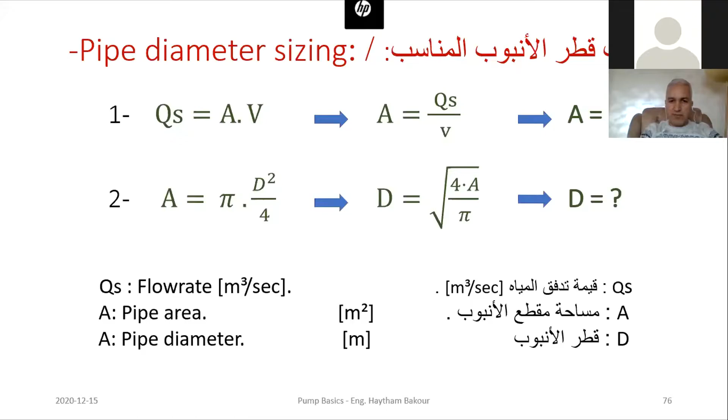To calculate the total dynamic head, H total equals H static, the static head, plus HF, which is the head losses in the pipe, plus HM, the minor head losses. Those minor losses happen within the accessories of the network, such as valves, U-turns, and any other accessory for the network. We reflect those as HM. We're going to talk about those in detail to reach the total dynamic head.

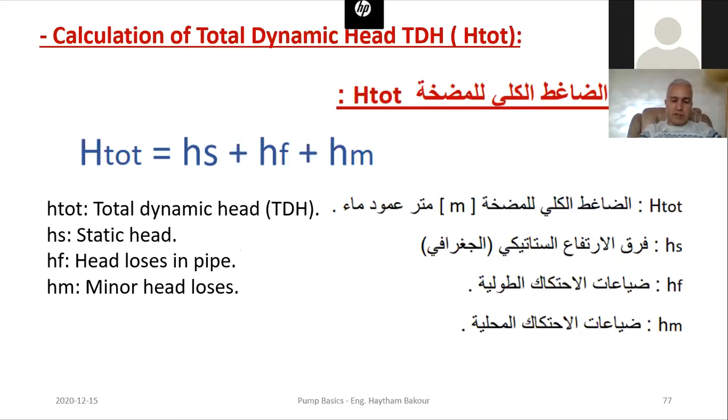We need to unify the units we are calculating with. We are going to talk about each one in detail, and we are going to see how we use them within the Excel sheet.

As a start, let's talk about the total static head. For the tank, we are pumping the water from and to, reaching the upper tank, so there is a total static head here, the elevation difference between the two tanks, the water surface difference between them. When the first tank is higher than the pump, we need to subtract those values from each other. When we have the tank lower than the pump, we need to sum the two values, between the first tank and the center of our pump, and the other tank and the center of the pump, so we can get this total static head as shown in the chart here.

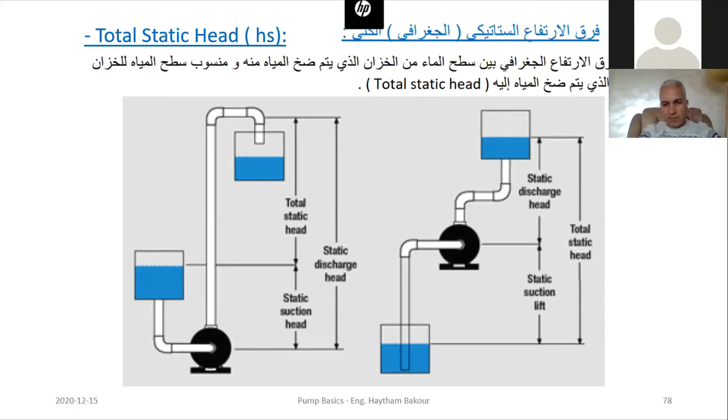So that is the total static head. You can notice that we are using many different terminologies, but this is based on many international references and even international companies. We are trying to combine lots of techniques and terminologies to make your life easier.

We are going to provide you with a program, like an automatic equation, that can give you the results easily. So L is the length of pipe multiplied by QS, which is the water flow rate, divided by the Hazen-Williams roughness constant multiplied by D, which is the inside pipe diameter.

So we have already explained those codes, but using which units. It is in meters of water. We are going to explain in detail from where we are getting those values and what are the variables, and we are going to provide you with the automatic equation to calculate those easily.

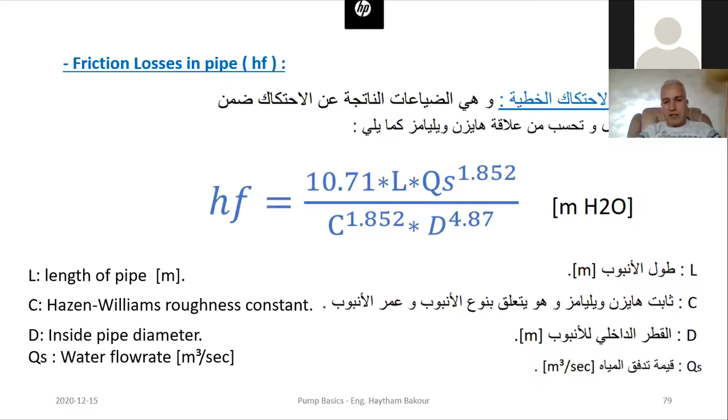Through this table, we can have the Hazen-Williams constant value. It is provided by the manufacturing company, or we have it based on the material. For plastic, it's 130 to 150. Polyethylene, PE, PEH, it is 140. For steel, new unlined, it's 140, 150. The older the pipe, the lower the value. So we are changing the value based on the age of the pipe, and it is between 130 and 150.

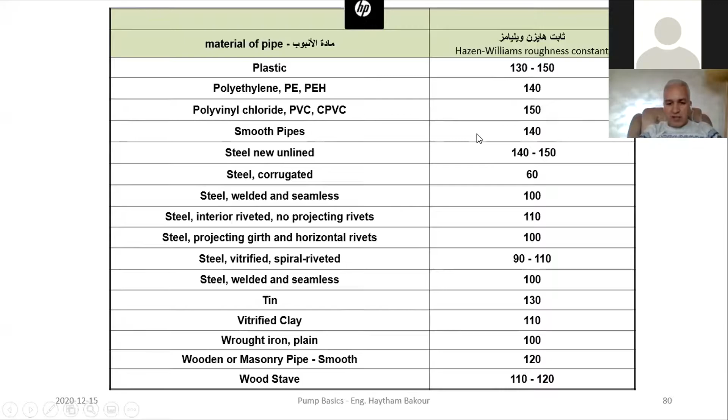And those are the losses from inside the pipe, while the other loss is the minor losses in the accessories, and those are within the accessories in the network, like valves and others. So those minor losses, Hm equals K, which is a constant, a friction losses constant provided by the manufacturing company, multiplied by V squared, which is the speed, divided by 2 multiplied by gravity. The result, Hm, would be in meters of water. It should be provided by the manufacturing company.

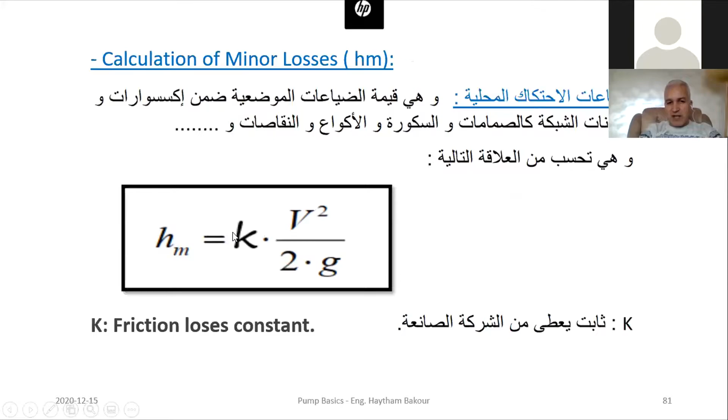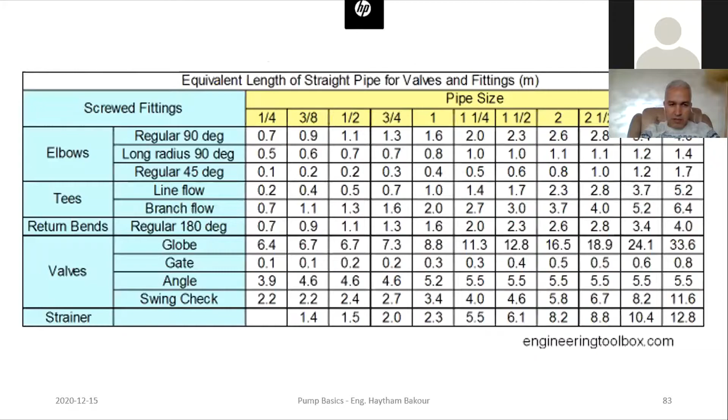We are going to talk about the software calculating those automatically, and we are going to talk about them step by step. This is providing the water flow rate inside the pipe, and the actual pipe diameter, everything. We are going to talk about it in detail when we are talking about the Excel software.

Yes, item, just one question.

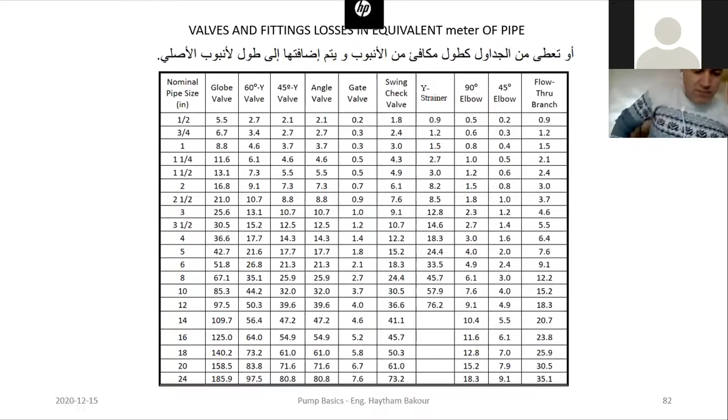No, we are not taking the speed of the water in this table. Never. I'm going to explain that later on, give me a minute. When we are taking into consideration the losses equivalent here, we are not considering the speed. We are going to consider the speed in a different table. This is about the accessory, what is the type, what is the diameter, and what are the losses. It is not about the speed now. Is it clear?

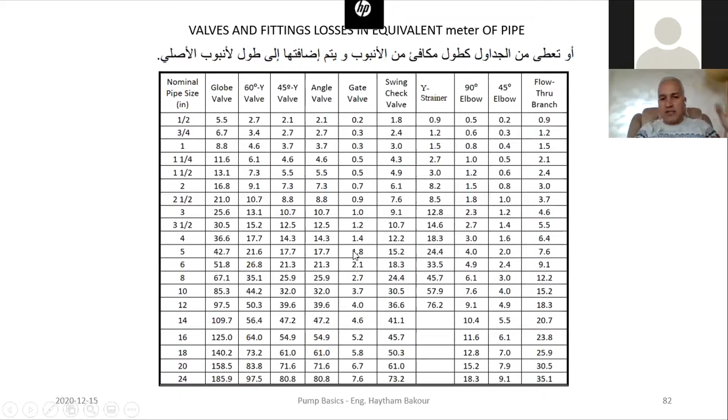Now we are going to explain the Excel tool, which shows in detail how we are calculating these values. Its role is to help the designer. We need to know the theoretical part, but this software makes our lives easier. We can change any parameter and it provides us with the end result.

If we have a flow rate, we put here the water flow rate. If you have 60 cubic meters per hour, and then the water velocity is 1 meter per second, it should be as close to 1 as possible. We put it in the orange cells, which is manual input, while the others are calculated automatically.

So based on the velocity I put, which is 1, I can find the pipe diameter is 5.7. But 5.7 doesn't exist as a pipe diameter, so the software rounds it up to a holistic number, which is 6 inches. Based on that, the software provides me with the exact actual water velocity, which is 0.9.

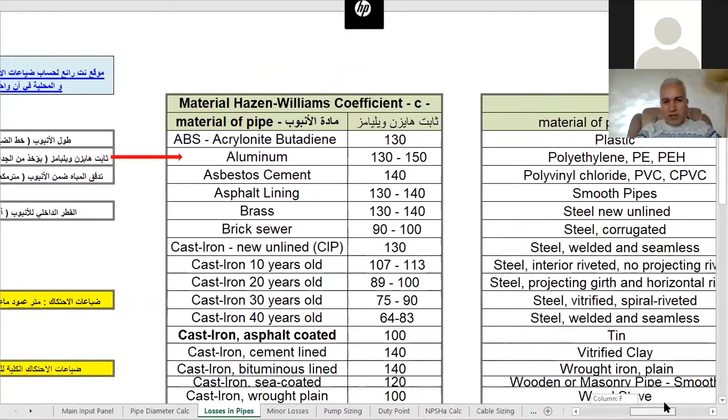So we have the length of pipes as 1,400 meters, and we have 120 as the Hazen-Williams constant, which we extracted from tables based on the type of material of the pipe. If it's iron and 10 years old, it's between 107 and 113. If it's 20 years old, the value is 89 to 100. If it's an iron pipe and 30 years old, the losses would be higher, which is 75 to 90, because it has been eaten from inside and has rust.

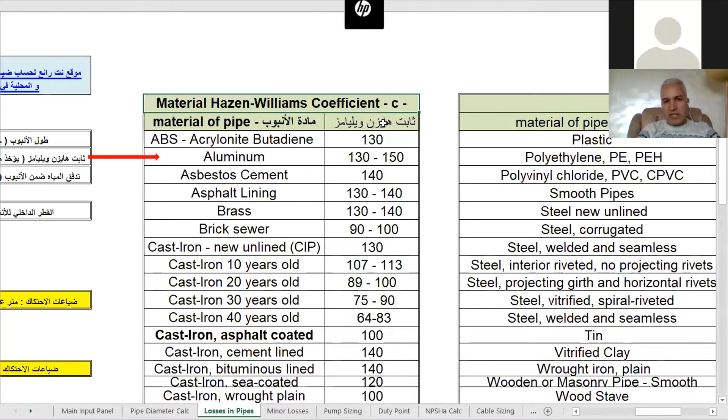So this is the Hazen-Williams constant and how we can find it. We put it here within this cell. So I have the first parameter as the length of the pipe, the second one is the Hazen-Williams constant, then the volume of flow, which has been taken automatically from the first page.

So we enter as input only the orange cells. This one is 5 inches as pipe diameter, which has been taken from this page automatically. So I have the friction head losses for each 100 meters of pipe is 1.8, and for the total head losses, we have 25.27 meters.

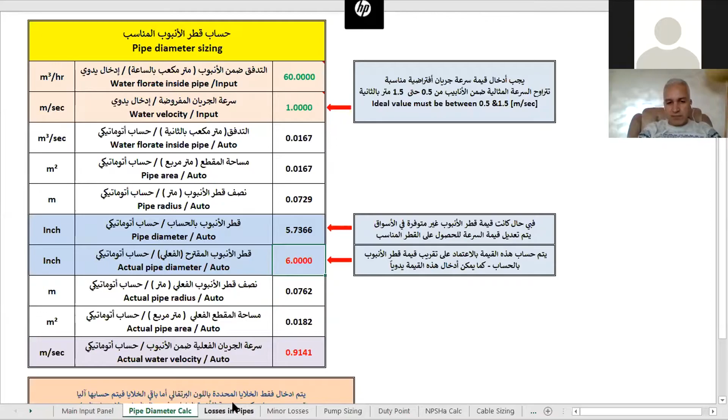This is very high losses, and I don't want it. So I go back to the first page, I change the velocity to be 1. Then I have the diameter of the pipe as 6, and the actual water velocity is going to be 0.9. Then I go to losses in pipes, and I see that the head losses are 10 meters. So I have won 15 meters by changing the velocity of water.

So for each meter I pump up, I'm going to add extra power to overcome these losses, so the startup value versus the value I'm getting through the years is going to be different. So those 15 meters we gained by time, maybe it's going to value the price of all the pipes I've used after 30 or 50 years. We are designing our project for 30 years as average. So for an economical study, we need to take everything into consideration so it can achieve logical losses and the economical results we are after.

So we go back to the question from Mr. Andre. Here we were talking about the length of pipe and those losses in length. So we are adding the minor losses here. Let's go to the minor losses page where we have calculated the accessories.

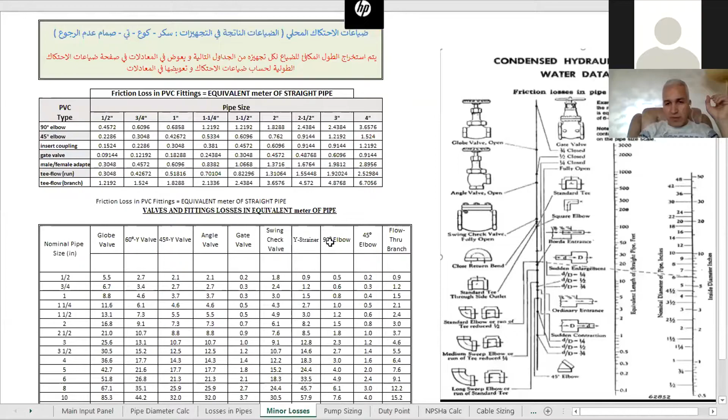So we go to this table, for example, as I talked about, we take from 4 inches. We have a globe valve as 36 meters of losses, and we have 4 elbows at 90 degrees, which is 3 multiplied by 4, equals 12. 12 added to 36 is about 48 meters. So we have this equivalence, and we put it here, and instead of 1,400, we add that value, 1,448, then we have the losses.

So those losses are not worth mentioning, that's why we call them minor losses. For some systems, the minor losses are really great and of high value, so we need to take those into consideration. If it's like 1,500 or something, we take 10% of it and add it to the total value, and this is an estimation.

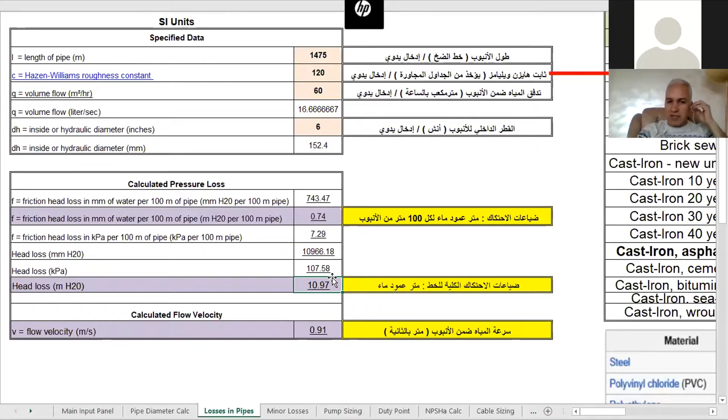The most appropriate approach is to calculate the losses of each accessory, multiply by the number of accessories, and convert it to the length in pipes. If we have the equivalent length as 75, we put it here as 1,475. Then we have the total head losses, which haven't changed much, but only a minor change. What are we having here? What are we getting here?

As those are minor losses, there is no problem.

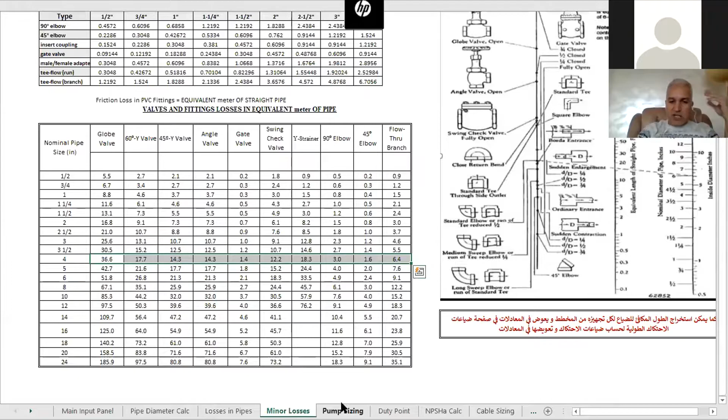Let's go back a little and talk about the last session, which was pump sizing. We can see the flow automatically based on the last page is 60. The total dynamic head is 42. Where did the software get this 42 from? It took it from this information.

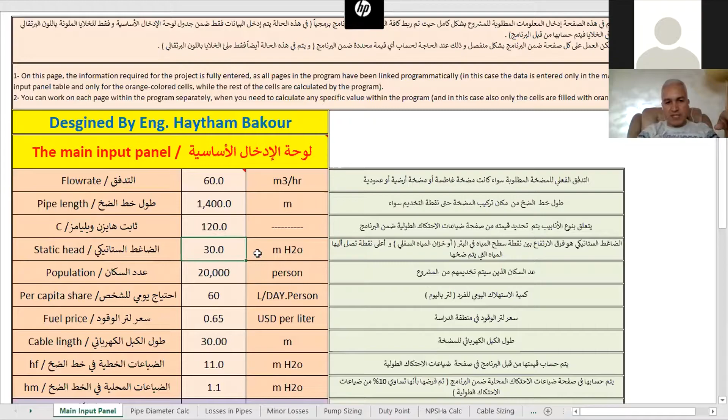Let's talk about it step by step. We are putting here the flow rate, the pipe length, the Hazen-Williams constant, and we have the population figures here, which we should put if we have them. Let's talk about that section. I put the static head, which is 30, and the losses as we have calculated are 11.

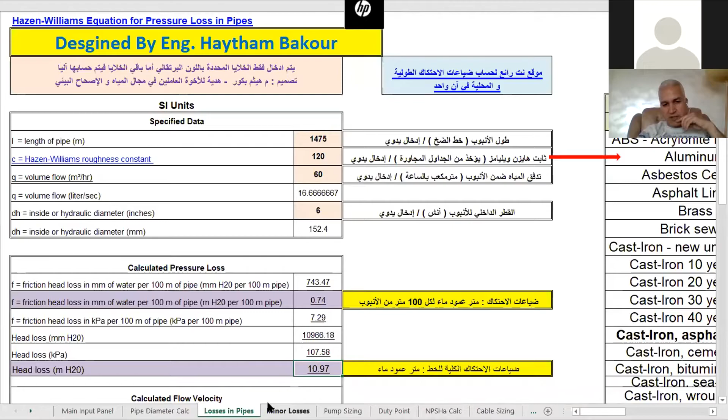So it is about 10.97, so it is 11, almost 11. And we have added 10% as local losses, and the total dynamic head is 42.

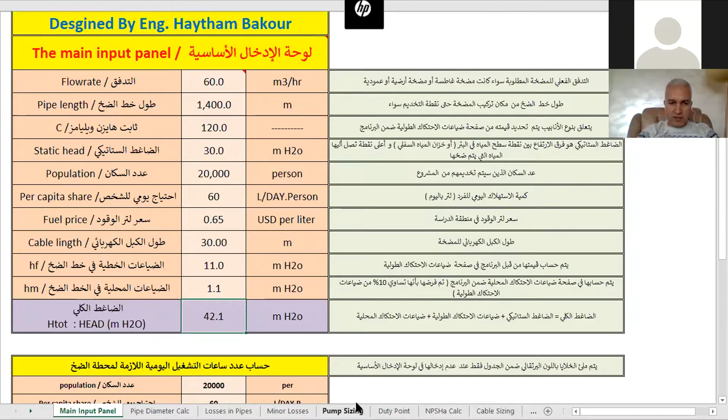Is this speed acceptable for you? Is it clear for you? Any comments? Would you provide me with any feedback to go slower or something?

So let's go back to the sizing of the pump. The flow rate is 60, while the total dynamic head is 42. Based on that, we are going to put here the efficiency of the pump as an estimate, so it is 0.75, as the efficiency of the pump motor is 0.9.

If we know exactly what the efficiency is, we should change it here. So we can have here the power of the pump in kilowatts and in horsepower, and we have the power of the motor in horsepower and in kilowatts.

This is the minimum power. We need more for the motor power, but this is the minimum power of the motor, which is 10.18. Maybe our power is not enough, or that capacity is not available in the market.

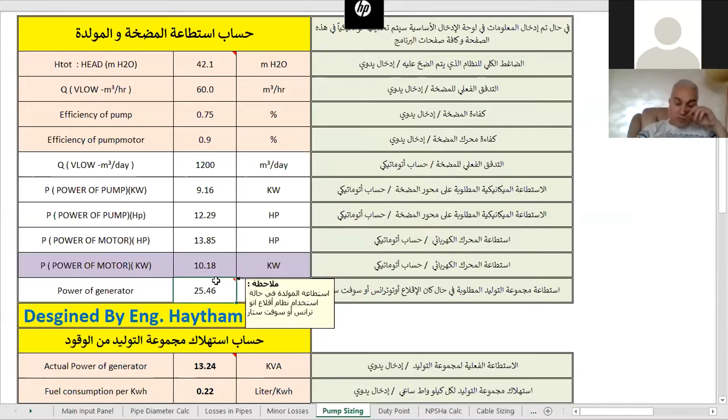Even the fuel consumption exists within this tool. It can even provide you with the consumption rate. This power of the generator is based on the type of the control panel. If it is inverter, soft start, or star delta, it differs based on the case.

So here, we have asked for a soft starter panel or autotransformer. While if it is inverter, it's going to be less. And if it is star delta or DOL, it's going to consume more. We have another page to explain this in more detail. Thank you.

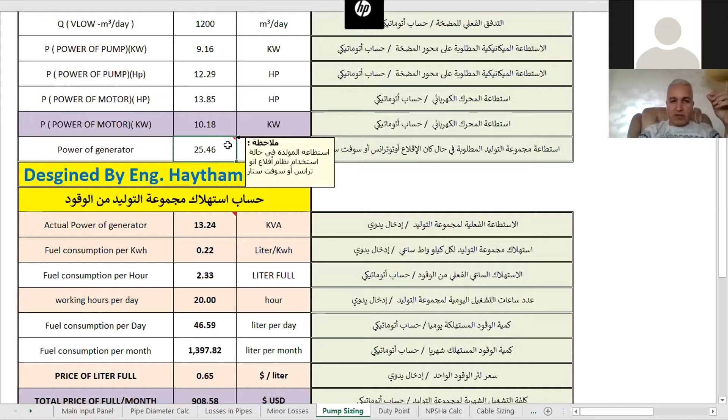We have this software, and I have developed this, and you can go to the equation. It is an open source tool. You can change all parameters you need, so it can be compatible with your needs, even for the fuel consumption per hour.

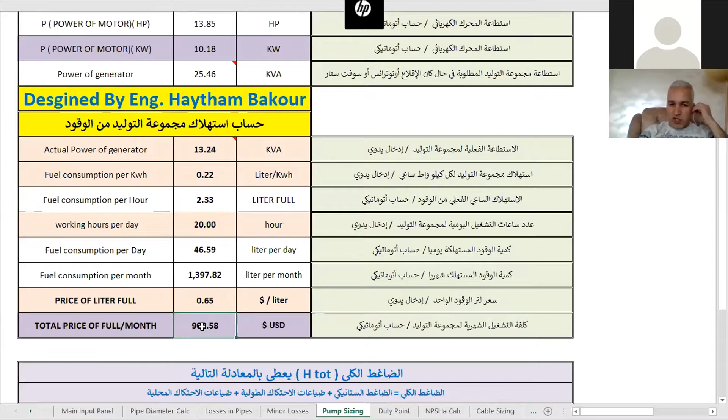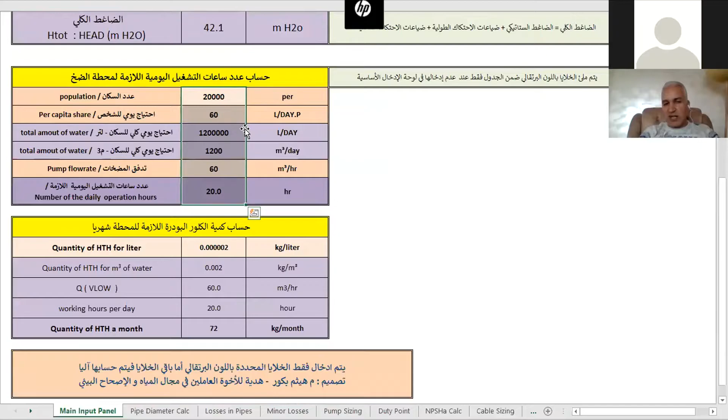So it can give you its consumption per hour based on how many hours you are using it per day. Even for the chlorine consumption or rate you ask, it can calculate. We're not going to talk about those; we are going to talk only about this calculation. You can see how many hours you need to start or work based on the population of inhabitants. We are going to talk today only about equations and losses. Any other questions?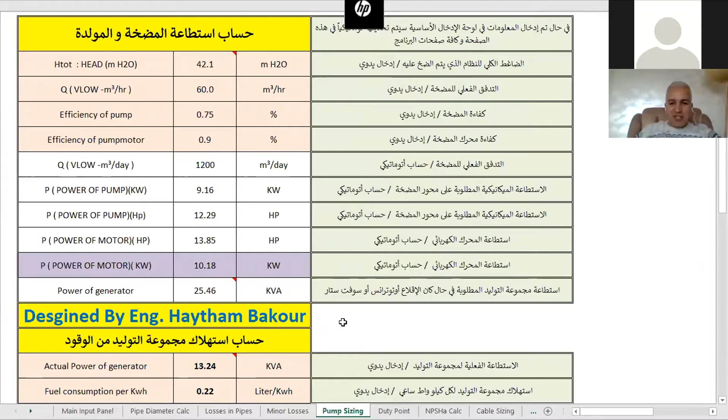We can say everything is clear now. Let's move to the next module.

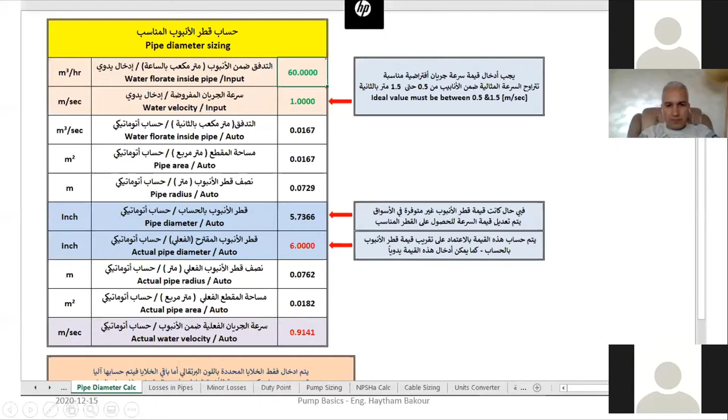We are going to talk about something else now.

The pump sciences are easy in a way, but being easier, it is better. I'm trying to simplify every terminology, but I need you to concentrate and focus more, please. We have simplified it as much as we can.

We have curves, valves, and accessories. So I need to draw the system curve I have. I'm going to speak about it in detail.

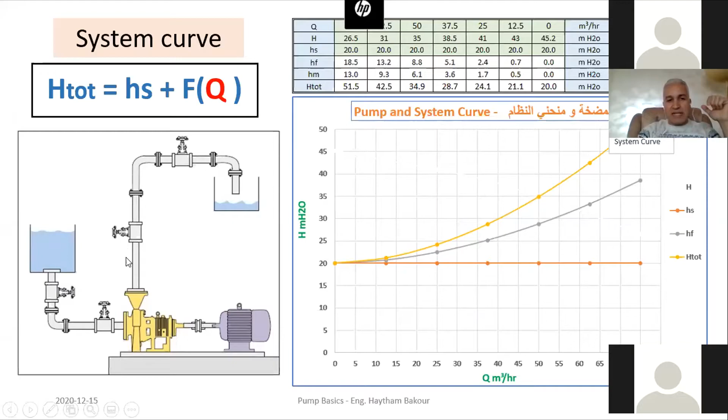And then I want to cross-check it with the pump curve. So I need the system curve, starting from the withdrawal and going to the end, based on what we worked on earlier, which is the total dynamic head.

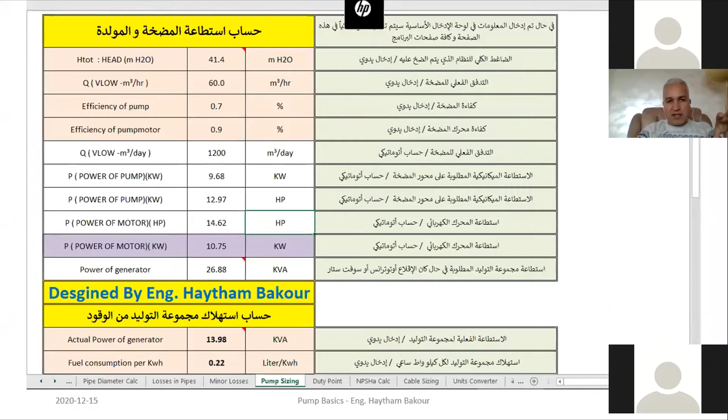So we have calculated that to some extent, and we are calculating the flow rate. If it is 40, 50, 60, 30, we need to draw that curve based on this flow rate.

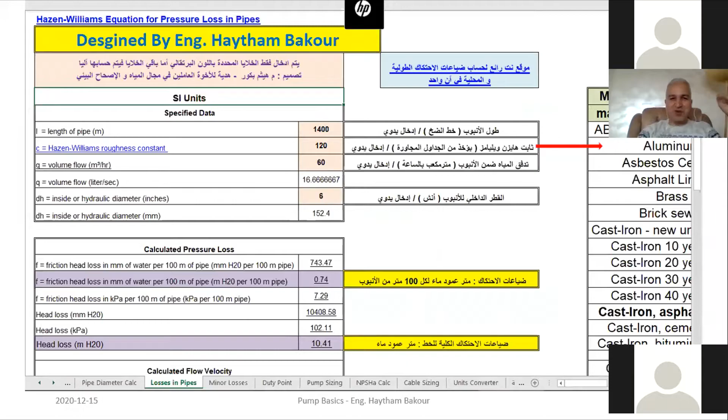I know it's a little bit confusing, but please bear with me, and I'm going to explain everything in detail.

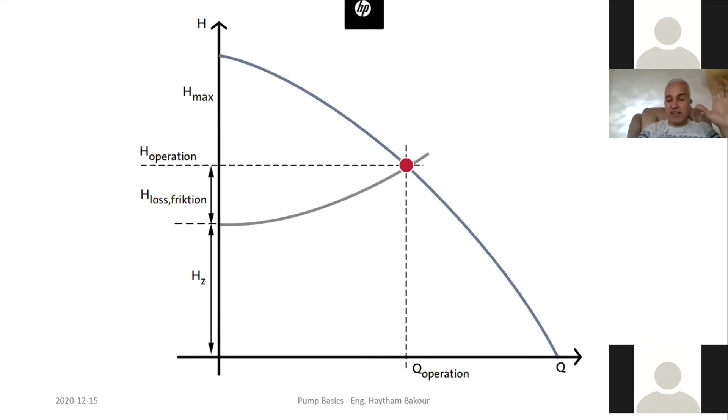As we have more flow, we have more friction losses. We're going to explain that in detail, and go back to the software which will draw that automatically, so we don't waste time on it.

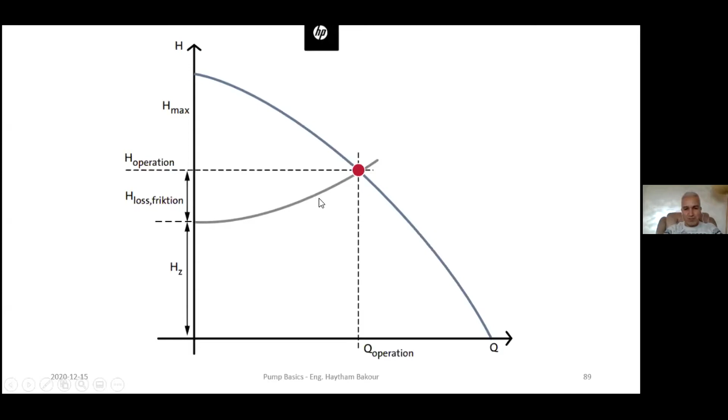What is it? What are its components? What do we have here? It's going to be really easy to understand.

As we said, H total equals the static head plus head losses in the pipe, plus HM, which is the minor head losses.

As we know, HS is almost the static head, related to the tank we are pumping from and pumping to, and it's constant, while HM and HF increase as the flow rate increases.

As the flow increases, the losses increase and the speed increases. So we have this equation: H total equals HS, the static head, plus FQ, the friction as a function of flow rate, covering head losses in pipes and minor head losses. So we need to draw this curve.

We're going to explain this in a simplified way, and the software is going to draw it automatically. As we said, it's composed of two parts.

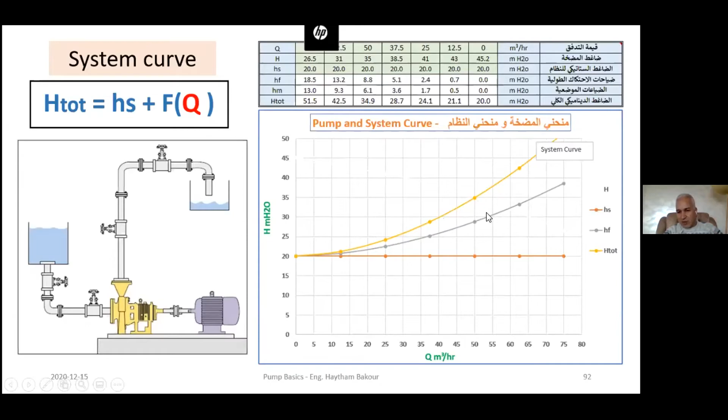We have the HF and the HM. We increased the HM here for studying purposes, and we're going to explain that.

So here we have this system curve in yellow. It's composed of the HS, static head, plus HF plus HM.

I believe it's clearer here. This is the system curve. At the flow rate 50...

We have the HS, the static head is 20, and it is constant. The static head is constant - it doesn't change whatever the flow changes.

While the HF is 8.8 meters based on the case study, the HM is 6.1. I increased that for studying purposes, but those are really minimum and minimal.

So we can notice for this curve that the more flow rate we have, and the HF and HM we have, this system curve is the sum of those three values.

So for example, as we can see here in the table, on the flow rate, let's say - I can't see it here, I don't know why.

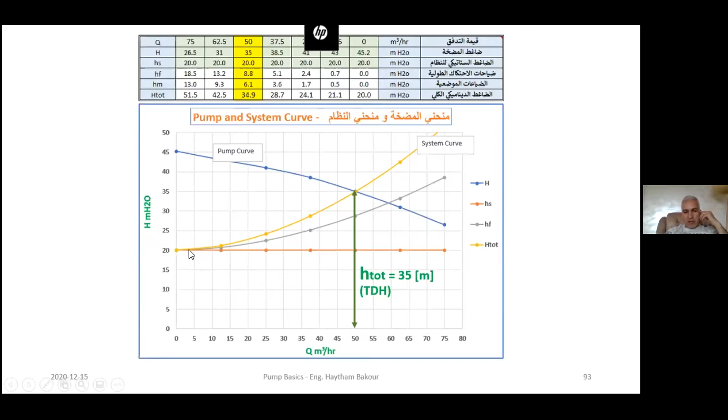Now, this system curve, we have drawn it. So this is the first system curve we have drawn, and we are cross-checking it with the pump curve, and we have this point here to talk about.

They intersect at one point. We call it the work point. We are going to explain more about this working point and how the software is calculating that automatically. Is it clear for you?

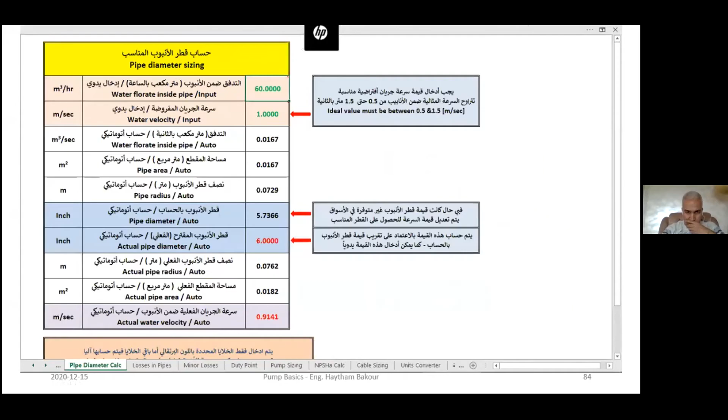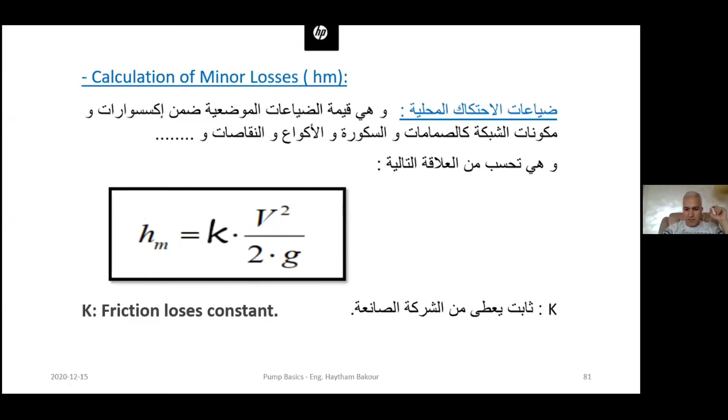What we talked about is the minor losses, HM, local losses. It is related and it is going based on the velocity. The more speed it has, the more losses we have. And the speed is about flow rate divided by the surface area. So if we have more flow rate based on some value, the losses increase more. If the speed is doubled, so the losses are quadrupled.

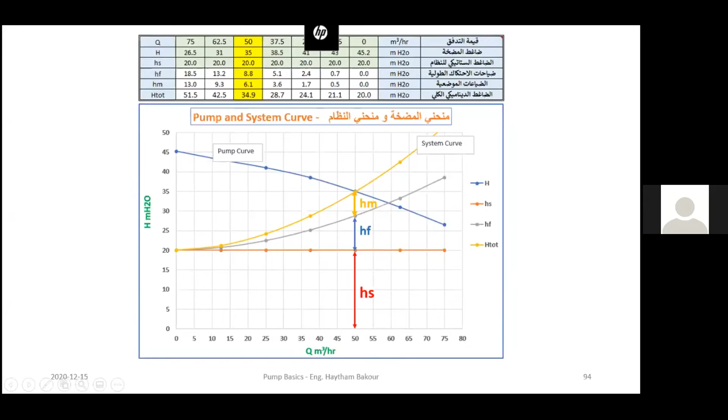As I said, some people or some colleagues who are newly graduate may have this question. This is only clarification. Thank you.

Much appreciated. Let's go back to the software itself, the duty point, and let's talk about the duty point or the system curve.

Can I take that panel to another place? It is moved now, thank you, it was bothering me. So now for this table, the software has taken those values

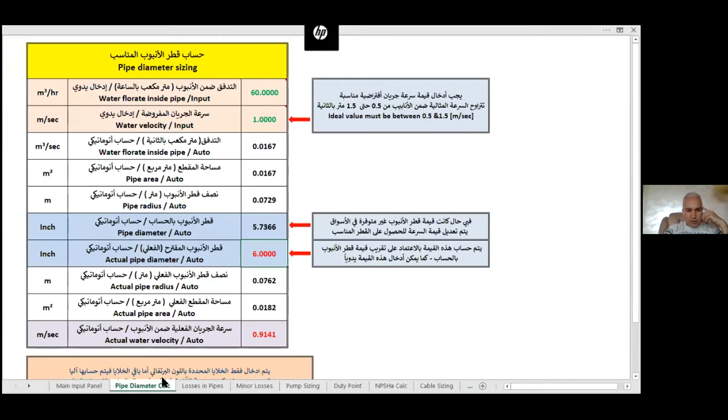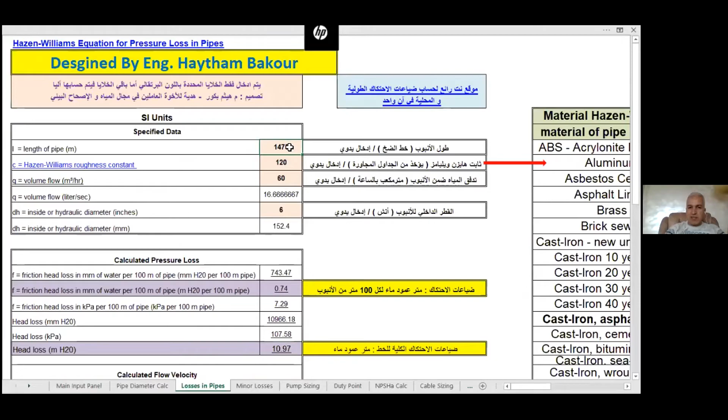automatically and calculated it and drawn the system curve, the duty point. It has calculated that based on the value I put here in the length of pipes. I put this value plus the equivalent length, then the software has calculated that automatically as a maximum point, a maximum value, and replaced it with the local losses.

Let's see it practically. We have this panel, this table. I enter those values manually. If I have this flow rate as 30, we enter this from 0 to 50 or to 250 something. Those values I enter regarding the flow rate and the system based on the length of the pipe

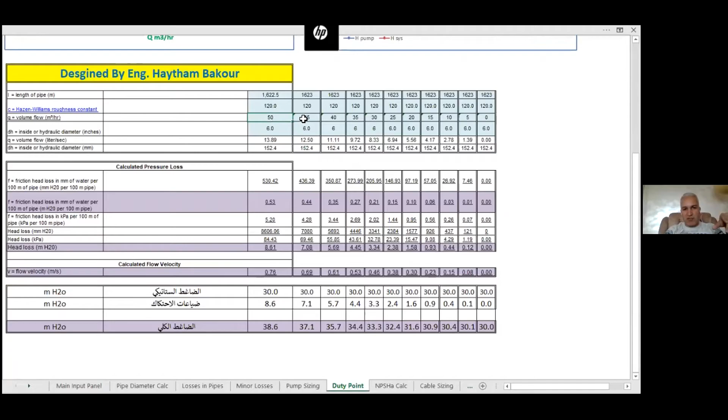and the static head, and the pipe diameter, and the Hazen-Williams value. So the software is calculating those losses and everything automatically and drawing the curve, the system curve, which is

here in red. You can see the more flow rate value we have, the more losses we have, HM and HF. And then we have the total dynamic head here increased.

As I put the mouse at any point, it provides me with the data you can see on the screen, the values of the flow rate and the total head. So if the flow rate is 40, the total dynamic head is 35.7. Why is the flow rate 50? So the total dynamic head is 38.6.

I believe it's easier for you. When the flow rate is 0, the total dynamic head equals the HS, which is 30, the static head. Is it clear, guys? Any question?

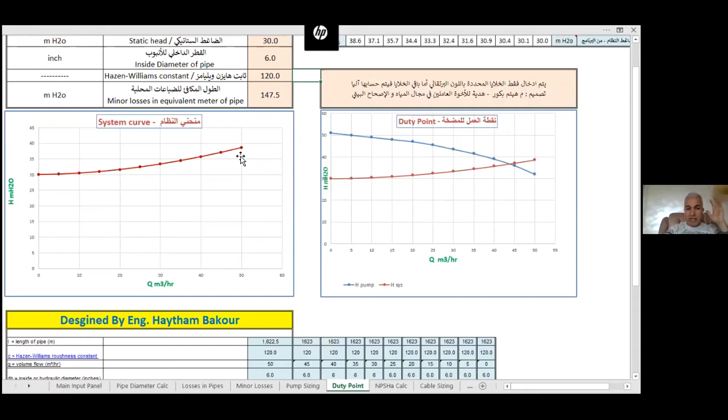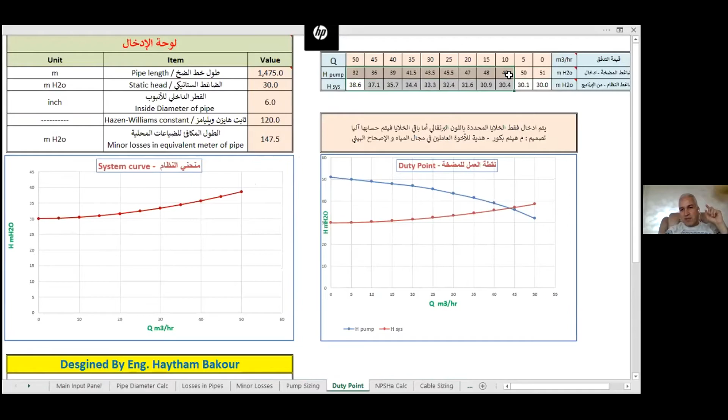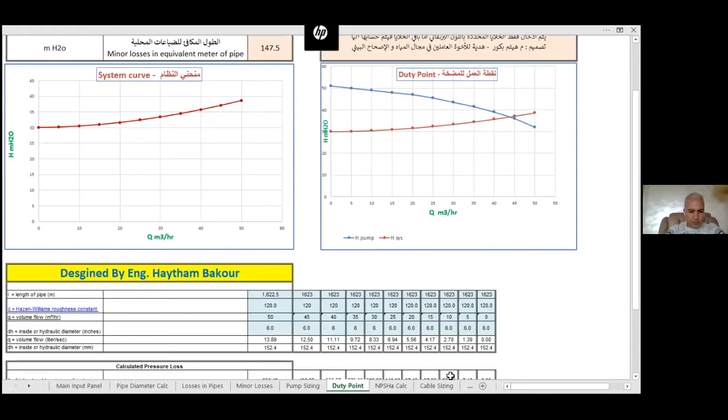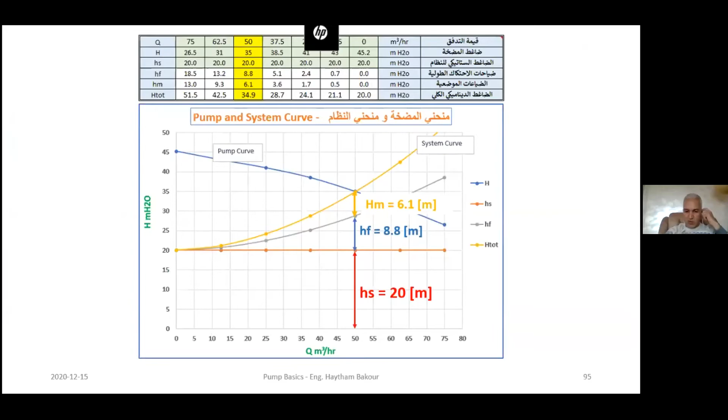I'm going to provide you with an example about this. Do you have any questions?

So we are going to talk about how to find the duty point for a pump based on the calculations we have. So I have here for Grundfos and some other types. I went to the website and they have changed a lot here. So I'm going to explain that in theory on the chart, and then we are going to look at the changes they have done on the website. Then we can explain better.

So for now, we are going to explain how to find the duty point for example, and we are going to explain our Grundfos.

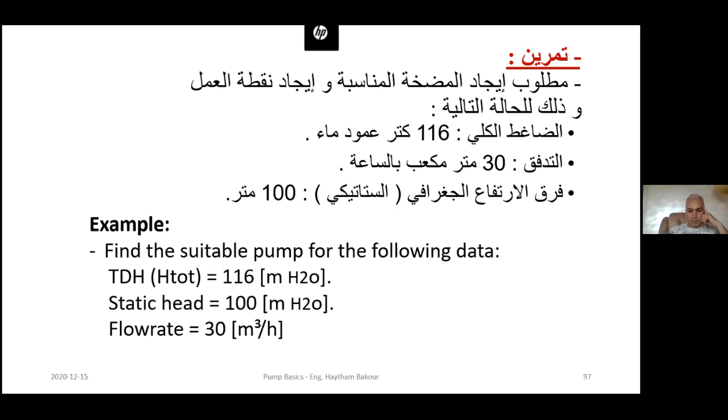So it is between 0 and 20 stages. As much more stages we have, the value is increased with the flow rate. So when we had, for example, 7 stages, we have the curve as this. When we had 14 stages, so the curve was looking like that. So when we have it like this, we need to increase the stages so I can increase the rate of the pump.

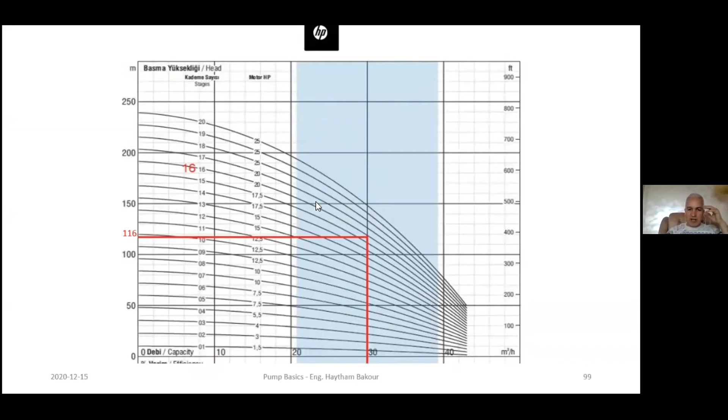And the horsepower is 20. So I go to the additional table from the catalog. So I have this curve in general. So I have the total efficiency we talked about at the last session.

So we choose our pump closest to the highest efficiency rate. So we don't use the pump at this end or that end. We need it within the blue scope. This is the best scope and range we need to choose.

So it is not okay to start or engage our pump unless it is between 70 and 110, which is the flow rate. So we don't need much losses in this area.

So I need another pump, or we can go to another company if we couldn't have the maximum capacity and efficiency. So the efficiency here is going to be 87%. So the losses in this pump would be only 13%.

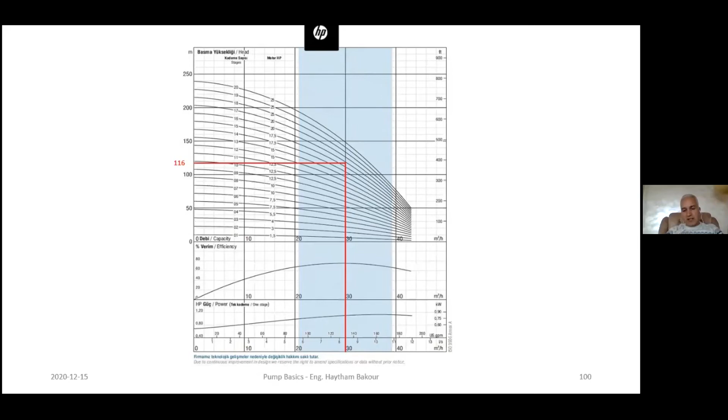And those losses are lost costs in addition to less in the age of the pump, because it is about some issues created by the shaft or the impeller. So we are causing shortage of the pump if it is not providing its good rate in its efficiency range. As you can see, it is 75 or 78% the efficiency.

This is the power. We are not going to depend on that shape only, but we are going to refer to the other tables by the manufacturer company on another page. So for the 30 flow rate, based on the 16 stages we have, I'm going to show you the catalog. Maybe I can explain more, or in simple words.

So 16 stages I have. The kilowatt is going to be 15. The HP horsepower is going to be 20. The dimensions, the total length with the pump is going to be like this: motor length, pump length, diameter of

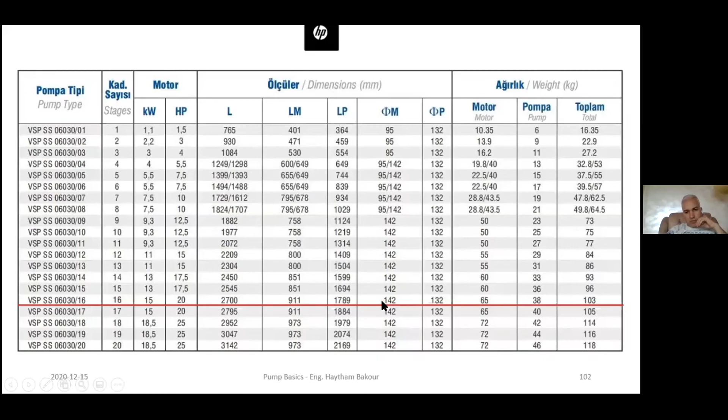Exactly. We can go to the catalog to explain better.

We are going to talk about our choice from Grundfos. I planned to explain from the website, but it has been changed, so I'm not going to do that. I'm going to talk about this.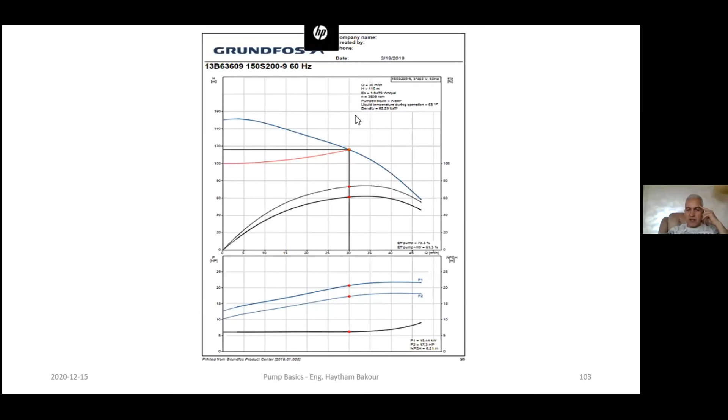Based on Grundfos, you provide the flow rate, and automatically it provides you with the type of pump they have, and you can choose which one you need. Based on this, we have chosen this pump based on the number of the pump, and we are going to explain later in detail how we have chosen this.

So we can see the curve here, and we can see the parameters of this pump. As for the flow rate, we have it as 30 and 116.

And it's providing me with the values here. As for the pump we have chosen, it's providing me with the duty point exactly as I need, but it is not like this - this is in zero condition. Maybe it's going to be a little bit more or less, and then we can choose the best for us.

So as for the 116H, the rotation of our pump is going to be 3,500 RPM, and the pump liquid is water, and this is liquid temperature during operation. So we can have here.

Assam, there is a question, I think, on the chat. No, it is not. Someone is leaving and he's sending an apology message. Okay, sorry for that.

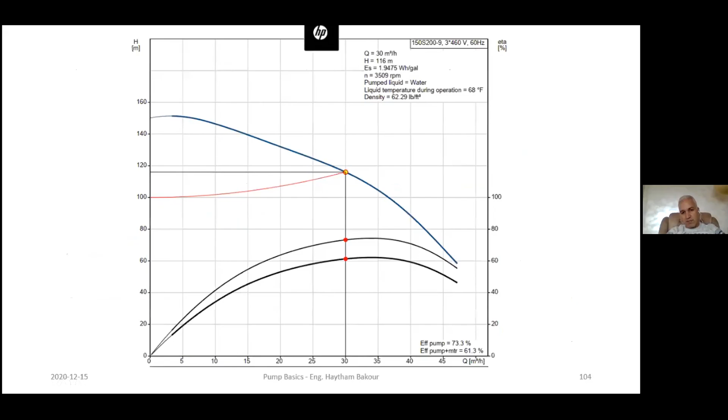So if the pump is in a well, the length should be 6.21 meter. If the water level is above this, there would be electrical shock or something - we're going to explain about that later on. I can see here NPSH, that's regarding

Impressive. Do you have any question?